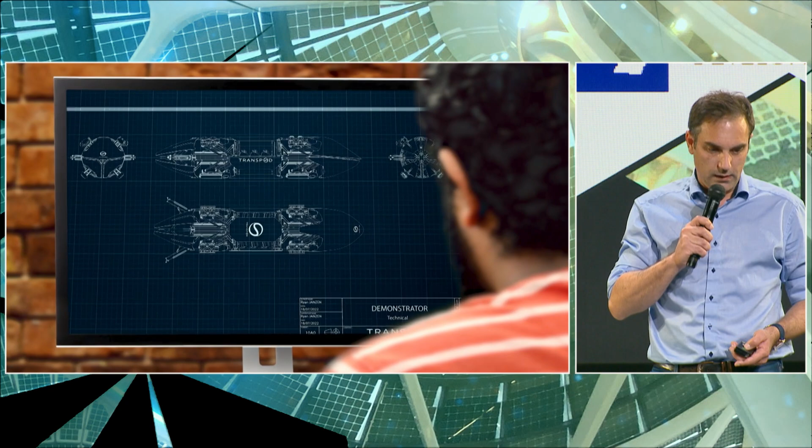So what are we talking about? I'll share a small video. Maybe we can dim the lights so people can see. This is the first demonstrator we unveiled in Toronto last summer. It's a third of the scale of the full-scale vehicle we're developing.

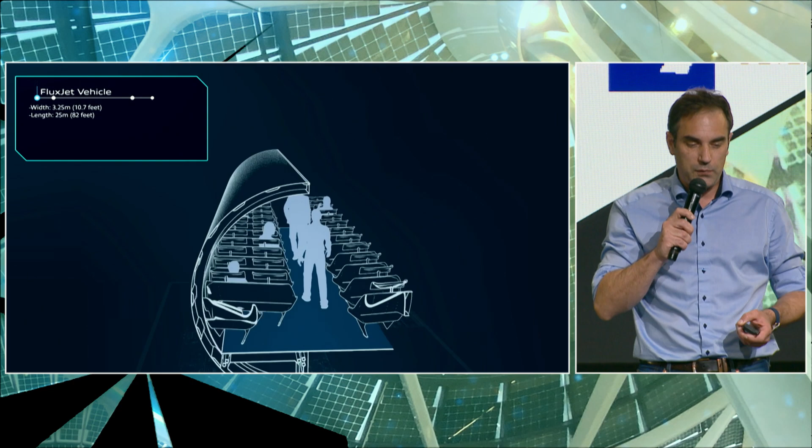This is the full-scale vehicle. It's about a 25-meter long vehicle. It's an aircraft without wings. This is the passenger configuration, and we also have a cargo configuration.

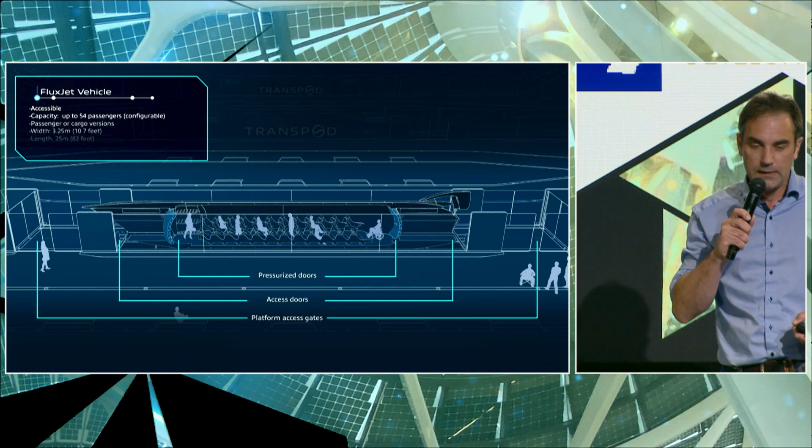Just to share a few remarks on the concept: this isn't something new, even if Musk popularized it a few years back. It's actually 100 years old. The concept consists of removing most of the air in the tube, down to about 100 Pascals, so close to zero.

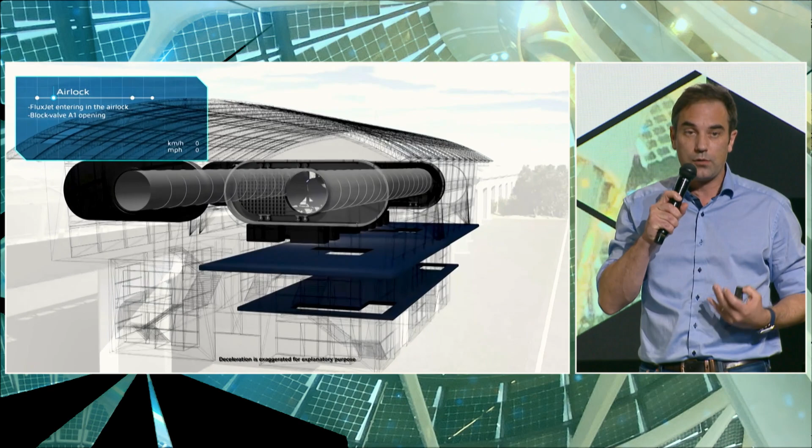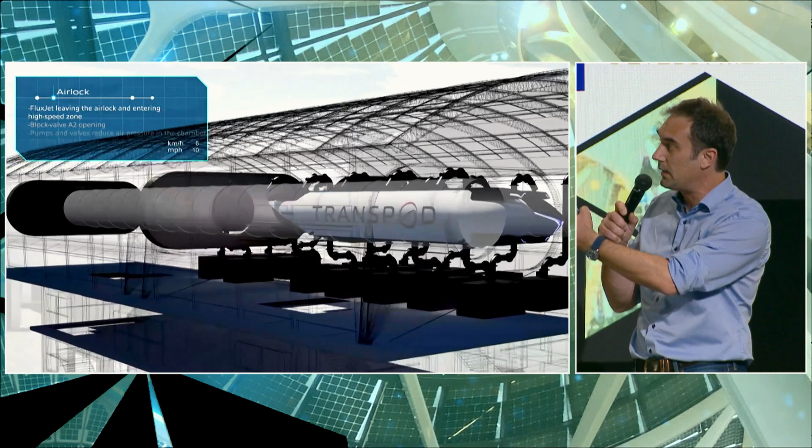This prevents the vehicle from having aerodynamic friction, allowing it to achieve speeds similar to an aircraft. What you just saw is the vehicle entering an airlock, moving from the atmospheric zone into a low pressure zone where it will accelerate.

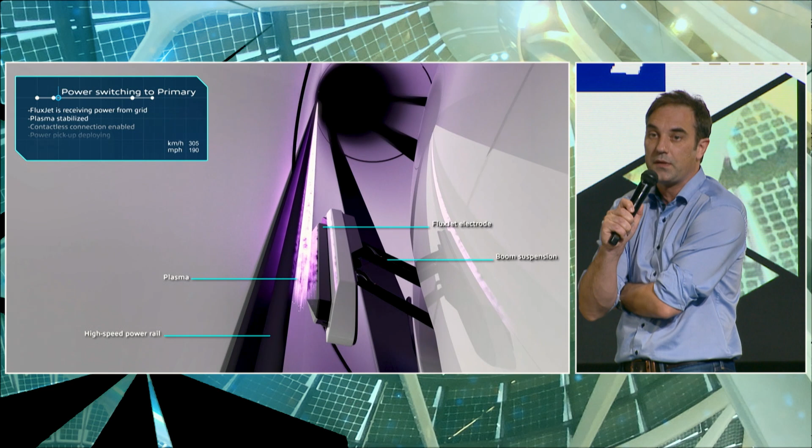What we demonstrated last year with the first demonstrator is the critical subsystems. The critical subsystems are power transmission, levitation, and propulsion. A few years back we decided not to go with a traditional maglev system because it's too expensive, but to put all the technology on the vehicle to keep the infrastructure as basic as possible.

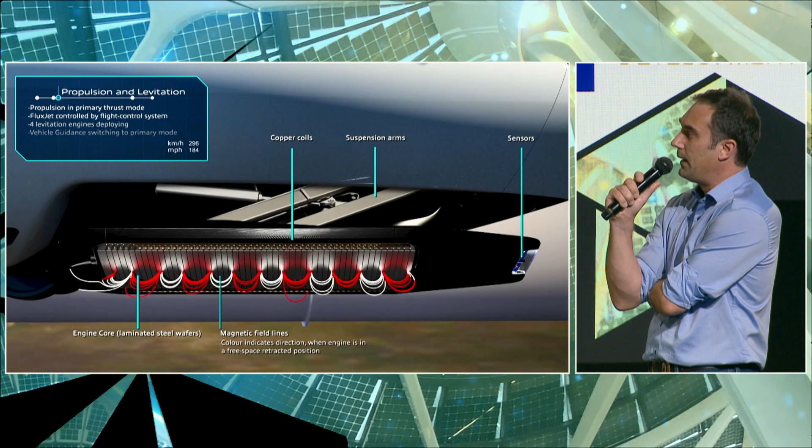So all the tech is on the vehicle. The power transmission you just saw is similar to what we have on a subway — a power rail and a pickup shoe — except it's frictionless, with no contact. What you saw here is the levitation and propulsion system.

The levitation system is located at the top of the vehicle, pulling it up thanks to electromagnets. The propulsion system is similar to linear magnetic engines, which already equip some existing trains today.

It's a guided system. It measures in real time the circumference of the tube to detect deviations and anticipate them, maximizing passenger comfort.

We're talking about an elevated infrastructure, though it could be underground or at ground level, depending on the geography. If you have the Alps to cross, you definitely need to dig tunnels. And to address visual pollution, the objective is to use trees and architectural design around the infrastructure.

Now let's discuss composites. As I mentioned, it's an aircraft without wings, so there are lots of composites here, similar to what's used in the aerospace industry. From initial feedback, most of the fuselage will be made of composite. To be energy efficient, we face the same challenge as the aerospace industry, since we need to be lightweight.

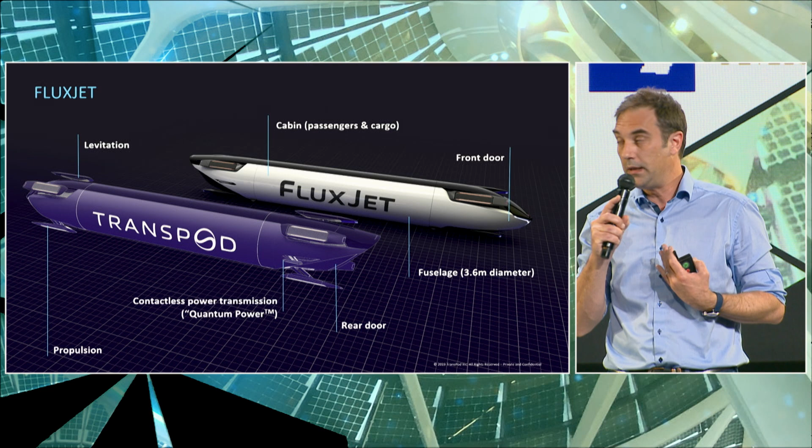For cargo, we'll use the same type of containers as airplanes, to minimize handling activities between the airplane and the FluxJet vehicle when transferring containers at the airport level.

A few words on the infrastructure as a summary: stations will have a similar configuration to railway stations, followed by an atmospheric guideway before entering the airlock. At the airlock, 99% of the air will be removed, and then the vehicle enters low pressure tubes where it can achieve speeds up to 1,000 kilometers per hour.

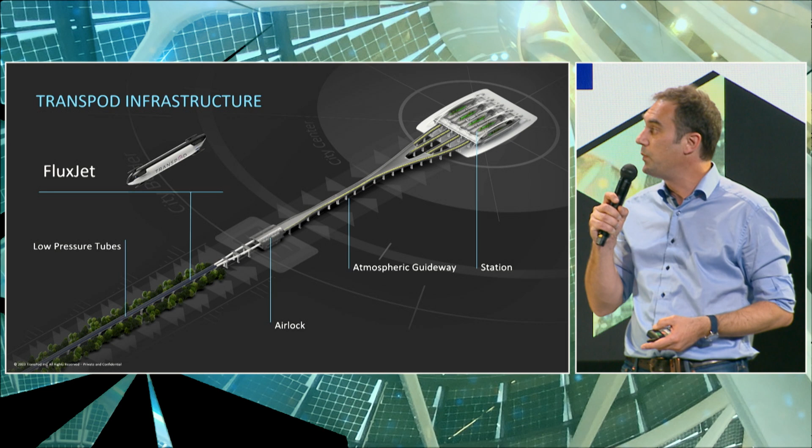Current progress - our main infrastructure project is in Alberta, Canada, where we secured a $550 million investment last year. We aim to start construction of the Edmonton Airport connection in 2024, next year. We're also doing some development in Texas, USA. We had an initial approval last year from Dallas, and we're working at the governor level to increase that corridor.

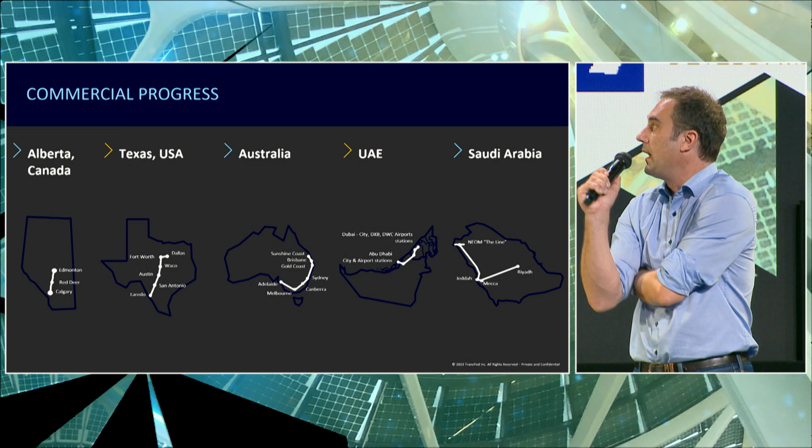To make it profitable, economically speaking, to Austin as a first line corridor. And then, of course, Australia, UAE, and Saudi Arabia - we're trying to push the project as well for the project they call the Line, or NEOM. You've probably seen that in the news.

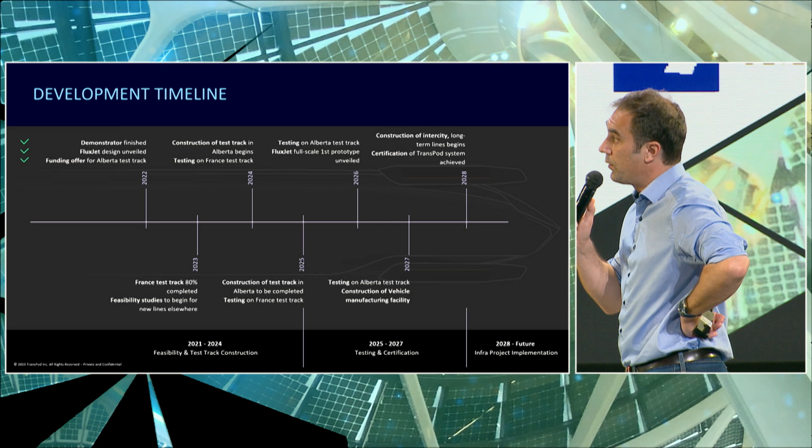Timeline: first demonstrator last year, unveiled in Toronto. We're doing all the admin work in Alberta, like construction permits, land acquisition, this year, to be able to kick off construction next year. We're still in the early phase, so despite the first demonstrator, we still have lots of R&D work to do over the next 3 years.

To be ready by 2026, when that first segment in Alberta will be ready. With that first segment, we aim for 2 years of certification with the authorities. The European Transportation Commission is involved, Transport Canada, Alberta Transportation, and this year we have to involve the US authorities as well, to demonstrate that this system is safe to transport passengers and goods.

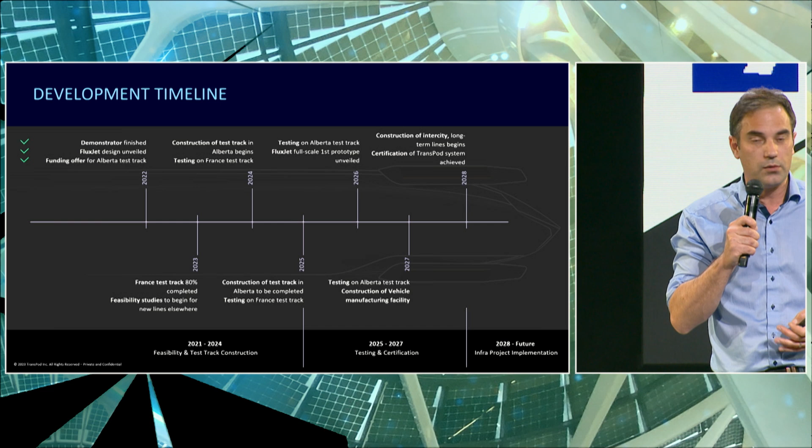By 2028, certification, which will give us the green light to kick off the full line, and we expect the full line to be operational before 2035. So that's kind of where we are. Lots of information - I'm expecting lots of questions. Please ask at the end of the panel.

There's a lot, definitely. And just maybe as a conclusion, this year one of our objectives is to secure suppliers - that's also one of the reasons we're here. So we're looking at players who master composite materials for the design and manufacturing of our vehicles. Thank you.

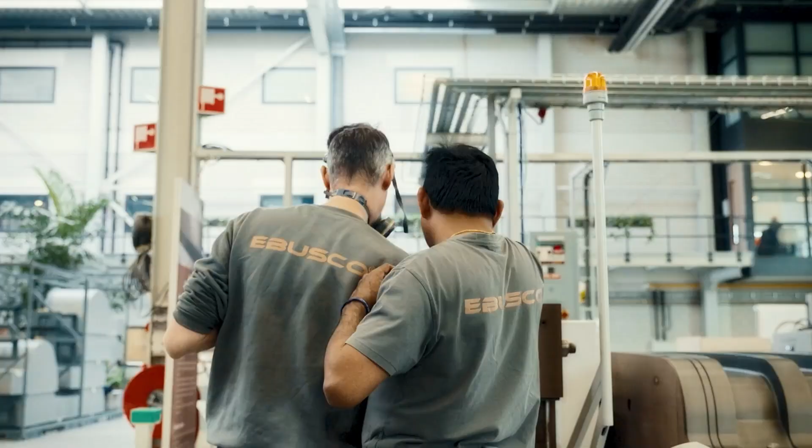I'm proud of the growth. I'm proud that we are a young player in the market, but already stirring the market.

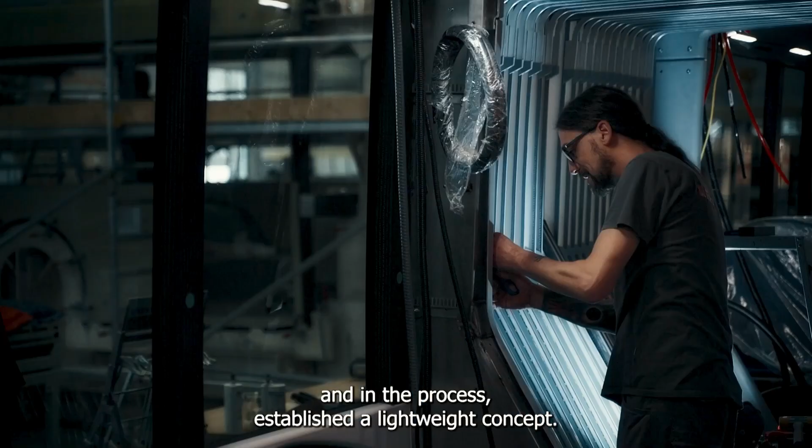I think it's the whole concept. Just to be part of the green evolution, and also to be part of this young team, this new product is amazing.

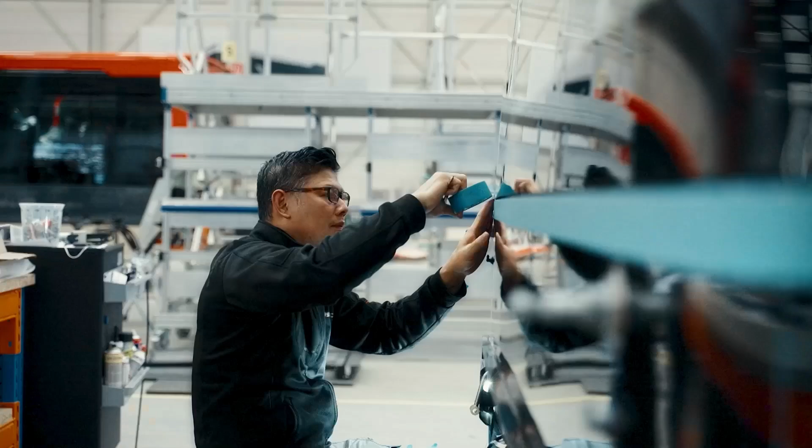All the credit should go to the team. They have shown that all their ideas and their expertise came together, in a short period of time, to create a beautiful bus.

Safe and lightweight design is an opportunity. So the only thing I can say to you is grab it.

Nice line there at the end, Jack.

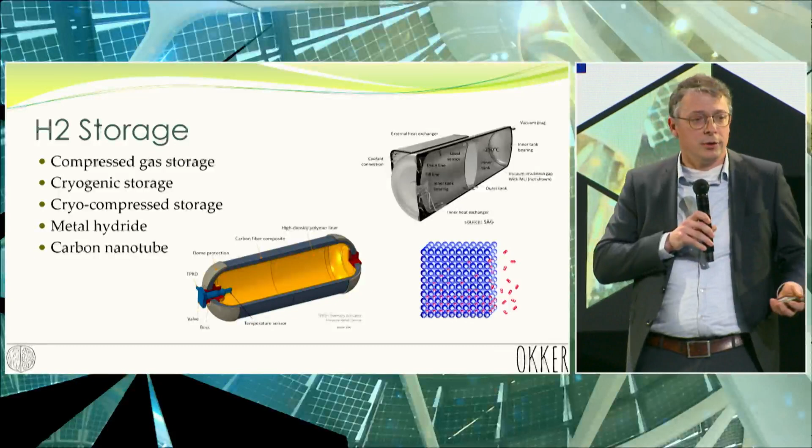First of all, hydrogen storage is not only possible in pressure vessels. I have here a few examples. Maybe in the future there will be more. But why is everybody looking at pressure vessels today?

It's because, of course, it's a mature technology today, but also the supply chain is there. Most importantly, the framework of standards and directives is there. So for every application you can find a standard which makes sense, and this gives you a certain scope where you can operate with your product, and a list of requirements you need to meet to be able to put your product on the market.

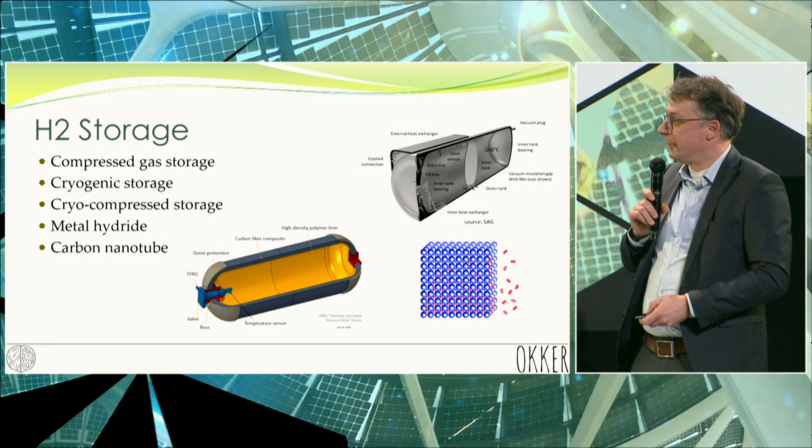Now that doesn't explain why on a composite show you see today so many pressure vessels. For that I would like to go back to the basics. For me, the basics is university, so I dove into my basement and found a book, because I like books, of course. I went back - maybe somebody knows it - it's the Timoshenko Bible for mechanics.

Beside that, there is the advantage of having fatigue properties, which are usually better in composites than for metals.

Now what's inside a composite tank? The ones that we see today in the hydrogen market are mostly type 4 tanks. Type 4 means it's a polymer liner, which is not load-bearing, covered and wrapped with a carbon fiber laminate, or at least a composite laminate. It doesn't always need to be carbon fiber.

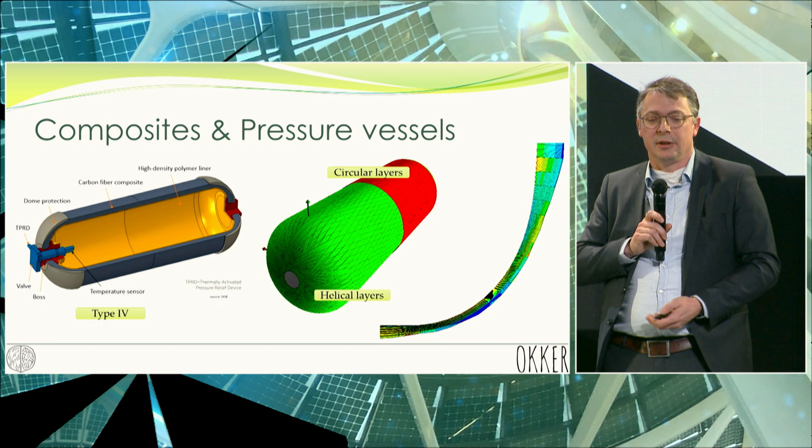Then on the sides you have these metal inserts called boss parts, and then there's a valve to be able to shut off the gas flow and maybe also regulate the pressure. In some cases there are dome caps. It's not a strict requirement - it's just that in some standards there is a drop test described, and in order to meet it without a heavy design, a lot of solutions are found in these kind of dome caps attached to the vessel.

Looking at the laminate, it's a combination of helical layers and circular layers, and this is where every manufacturer probably has his own philosophy to build it up.

What we also see is that for these high pressures - hydrogen typically at 700 bar - you run into thick-walled composites. Easily you can get 40, 50, even more layers in a laminate to build up the structure to withstand the pressure. So thick-walled composites cause some typical aspects which you need to take into account during the design.

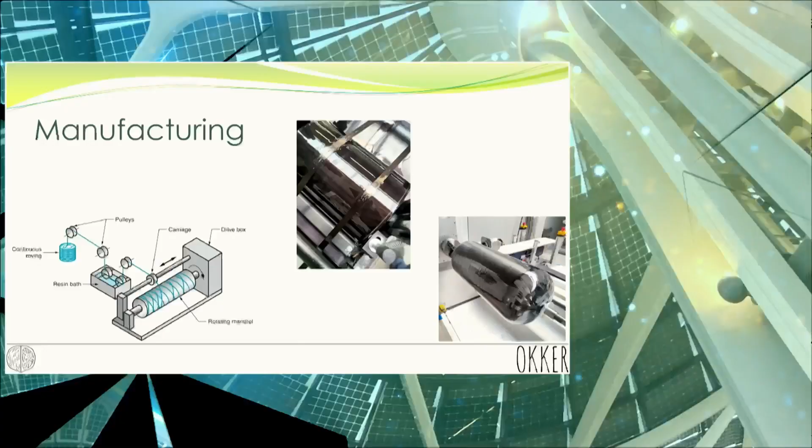As for manufacturing, filament winding is a very old technique, but it still meets all the specifications needed to deliver a mass product. The fibers are put in the right directions, it's numerically controlled, and the repeatability is quite high.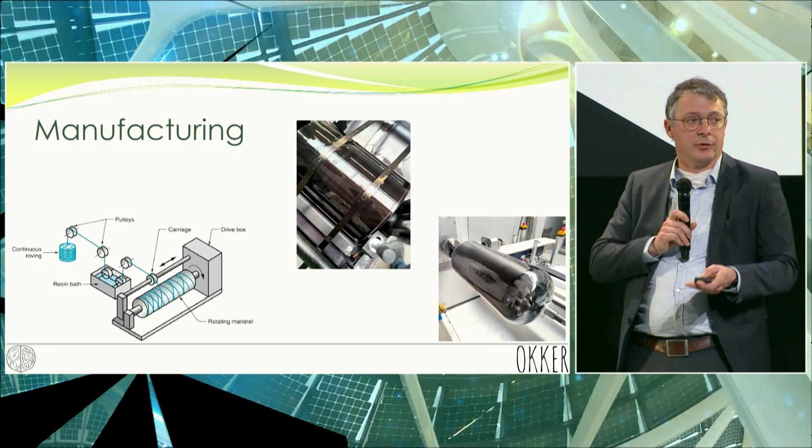A very general rule of thumb is that a fuel cell electric vehicle, with a typical range of 500-600 kilometers, uses 5 kilograms of hydrogen at 700 bar. Some are able to get more range out of it, but this is more or less what we're looking at. And then 50 kilograms of carbon fiber is needed for containing this hydrogen. This gives an idea how much carbon fiber is needed for this market.

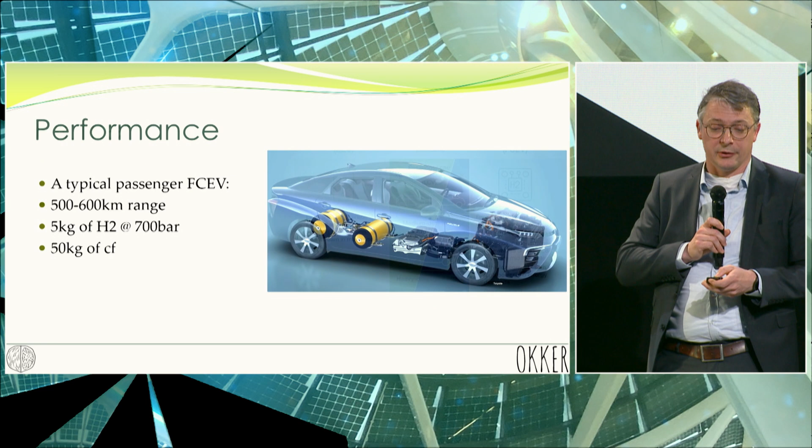Now, what does the market look like? It's of course the typical discussion between battery electric vehicles and fuel cell electric vehicles.

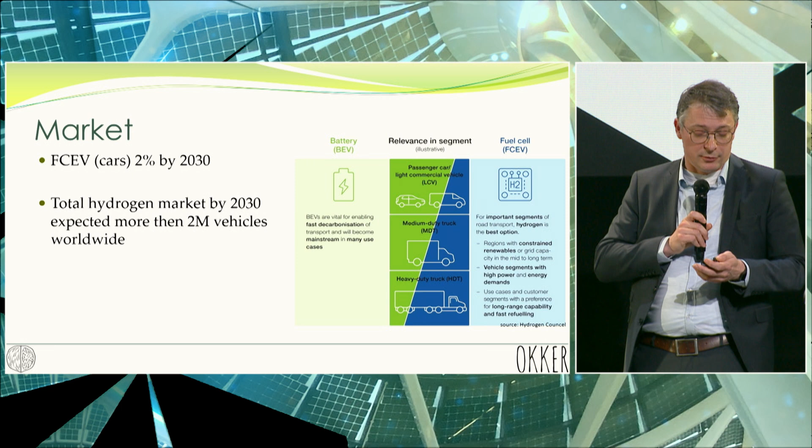But of course, a vehicle is one thing. You need to get the hydrogen to the vehicle, so there is a certain supply chain before that, which we also need to help out with our pressure vessels. So the related markets, in this case, it's not really ground transport, but we need it: refueling stations, transport of gas, storage of gas, stationary storage of gas. Basically, you need high-pressure vessels to store your hydrogen. And we need the same materials or similar materials as for the pressure vessels we're using in our vehicles. Usually the standards are different, so the design could be a bit different, but in terms of material manufacturing, it's using the same technologies.

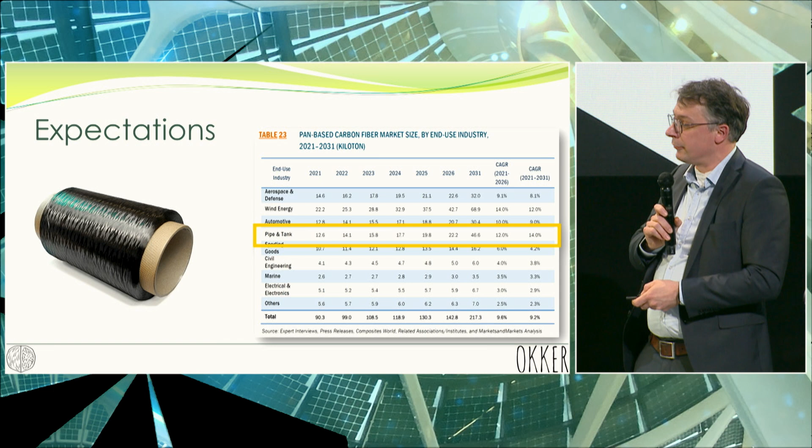Expectations in design: the focus will probably be on reducing carbon fiber content in the products. But also here on the show, we see already some new other concepts for storing hydrogen in tanks, for example these kind of tubular or S-shaped vessels that are out there.

Now, in terms of processes, the market is really scaling up to get this to a nice and robust state. The requirement will be to have better process control, higher productivity, etc. In terms of materials, the focus today is on carbon fiber. The question we can ask ourselves is: does a pressure vessel really need to be fully made out of carbon fiber? Could we make combinations with other materials that are not out there maybe yet? But the question here is, why do we need such a light design for every application?